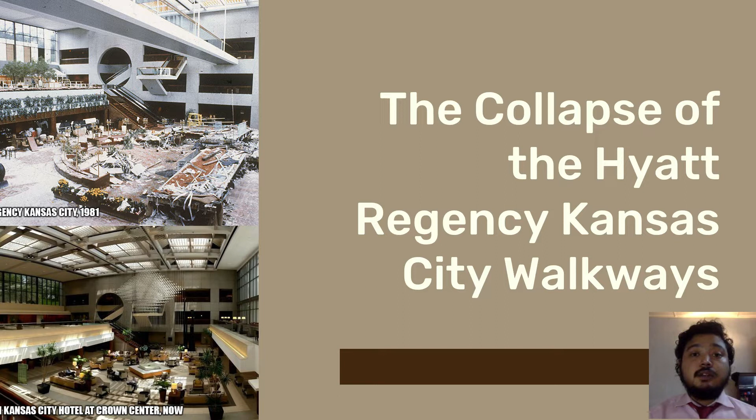Presenting the video during the event: July 17, 1981, Kansas City, 7:06 p.m. At the Hyatt Regency Hotel, two massive steel and concrete skywalks have just collapsed onto hundreds of people enjoying the hotel's tea dance. The area just inside the main entrance is now a mountain of smoking rubble. The collapse has broken a water main, and the lobby is slowly filling up with water.

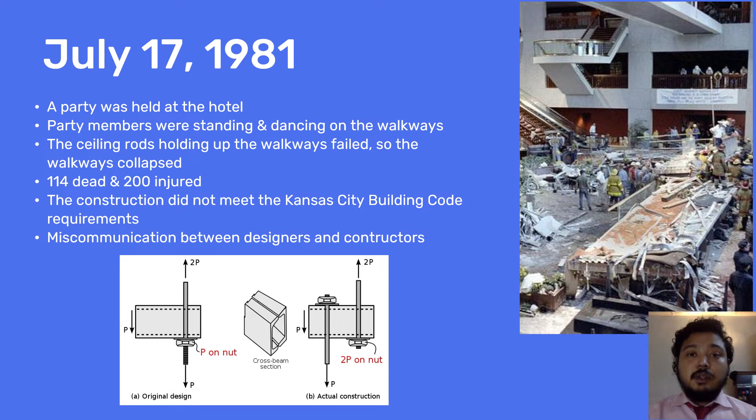On July 17, 1981, a party was held at the hotel. Party members were standing and dancing on the walkway. The ceiling rod holding up the walkway failed, so the walkway collapsed. During this event, 114 people died and 200 people were injured. The construction did not meet Kansas City building code requirements, and there was miscommunication between the designer and the constructor.

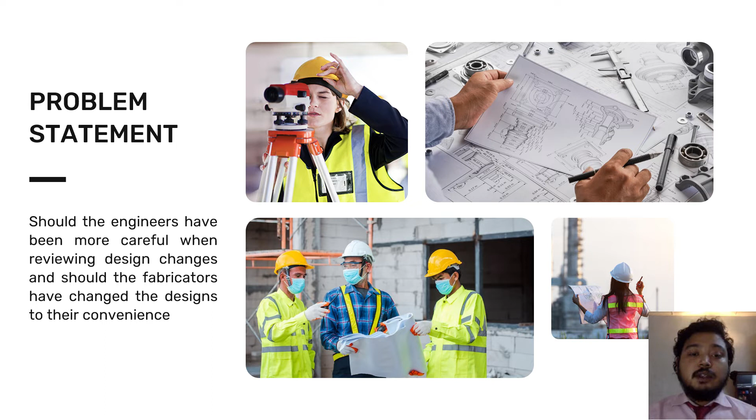Problem statement: Should engineers have been more careful when reviewing the design change, and should the fabricator have changed the design to their convenience? This raises an ethical issue.

Safety of the public was at stake, disregarding public welfare. The project engineer did not make any calculation for the design, but claimed it was safe. This shows negligence and incompetence of the engineer, and unprofessional conduct. There was a failure to meet city standards, and the fabricator worked to their convenience, not for the benefit of the public.

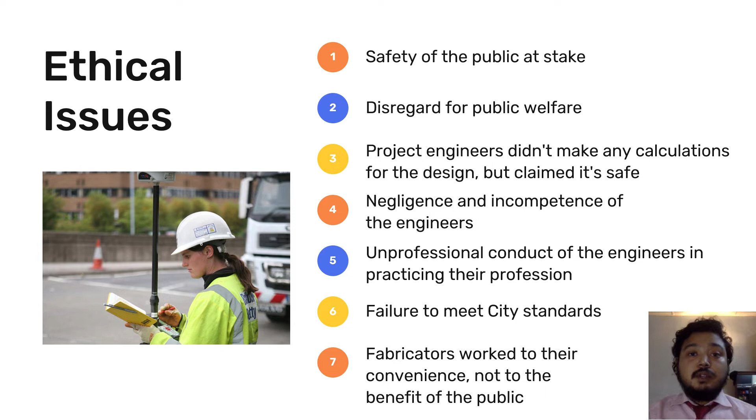Facts during this event: there was a party held at the hotel, two walkways collapsed, and the construction did not meet city requirements. The design change was a result of miscommunication. The fabricator changed the design, and the change was not noticed by the structural engineer. Many lives were affected, directly and indirectly.

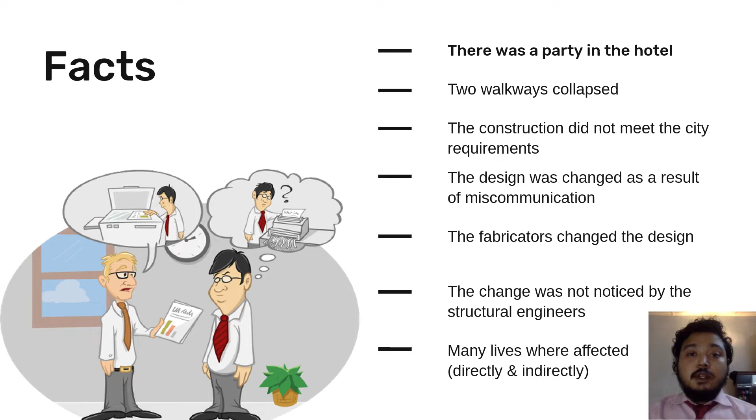Alternatives for this event: the engineer could accept blindly any change made to the design, or reject completely any change made to their design. The fabricator could proceed with the design as it was initially developed, regardless of difficulty, or find a better solution by giving it more thought and research.

The engineer can review the design modified by the fabricating company in more depth and perform calculations before approving. After the ceiling collapse due to connection failure, a thorough investigation into all connections can be done, not only to the ceiling. After the dispute happened, phone calls should have been made between engineer and fabricator to ensure there was no severe miscommunication.

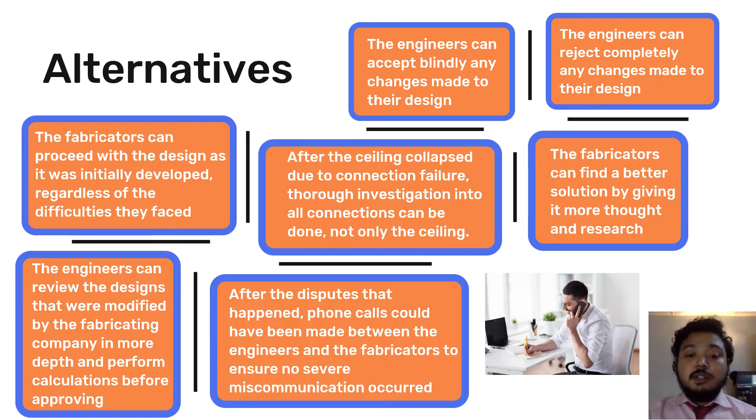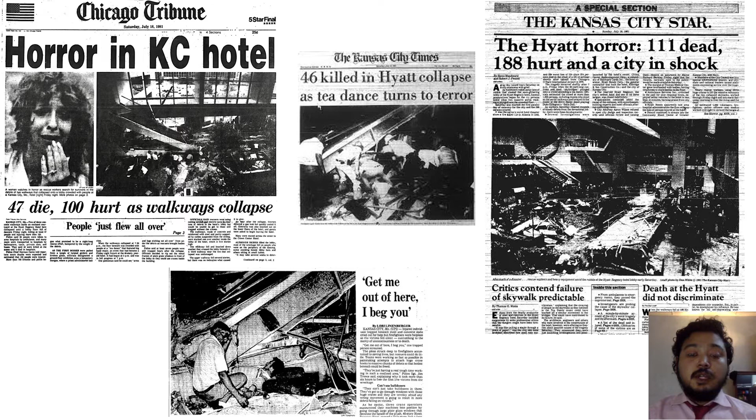Presenting the article during the event: as we can see from the Chicago Tribune, there was a reported 47 people dead. This number continued to grow as the days continued during the investigation.

Next, we will explain the second case study, which is Stadium Sultan Mizan Zainal Abidin's roof collapse. The incident happened on 2nd June 2009. At 9 a.m., while morning workers were doing maintenance, the sound of collapse was heard.

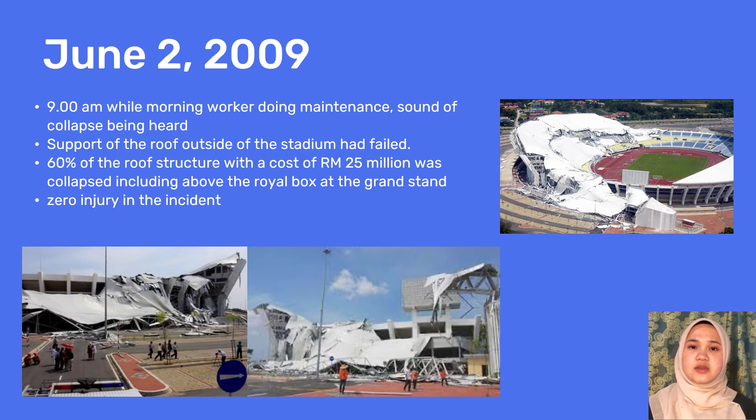The support of the roof outside the stadium had failed. 60% of the roof structure, costing RM25 million, collapsed, including above the royal box at the grandstand. This incident was reported with zero injuries.

This situation was thought to be out of standard because the engineer studied the leftover rubble, and therefore determined the speed of the collapse.

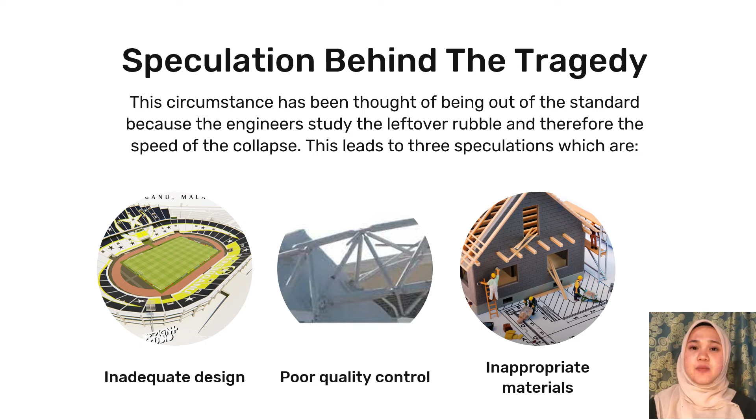This led to three speculations, which are inadequate design, poor quality control, and inappropriate materials. According to the State Infrastructure Development and Public Utilities Committee, the proposed method of work provided by the contractor to open the roof frame in the center was not accurate.

Here are some real reasons behind these tragedies. First, inadequate design with insufficient safety measures. Second, the designer failed to take full consideration of the roof structure support condition. Third, the roof is badly erected, resulting in inconsistent geometry.

There is no quality control for on-site safety measures. The material and manufacturing quality do not meet the specification. Lastly, the sensitivity of the spatial frame roof structure requires consideration to support flexibility in design mode, which was not done.

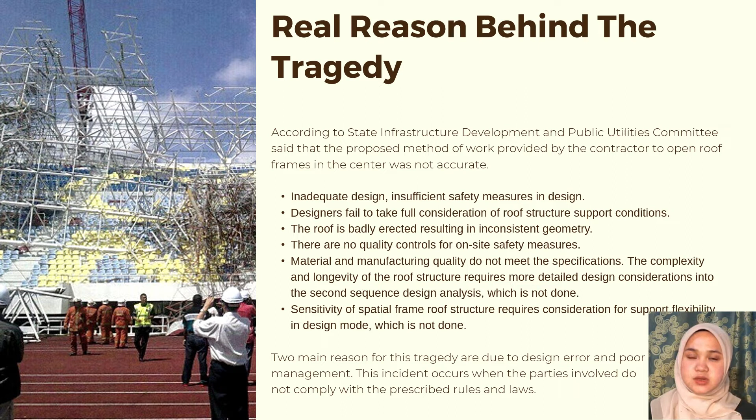From the above statement, we can conclude that there are two main reasons for this tragedy: first, due to poor management, and second, due to design error.

This is the flowchart for the design error factor. First, is the choice of material appropriate? If no, staff hired must supervise the process. If yes, it will go to the second process.

Does the concrete stump and the concrete buttress pass the regulation? If no, it will follow the regulation that had been set for the concrete. If yes, it will proceed to check and test the steel component.

If no, it will perform quality control and safety measurement by the management team. If yes, the structure of the roof is good and safe to use.

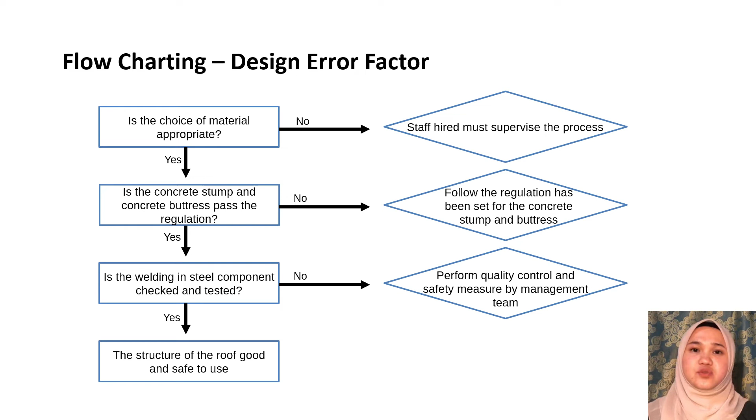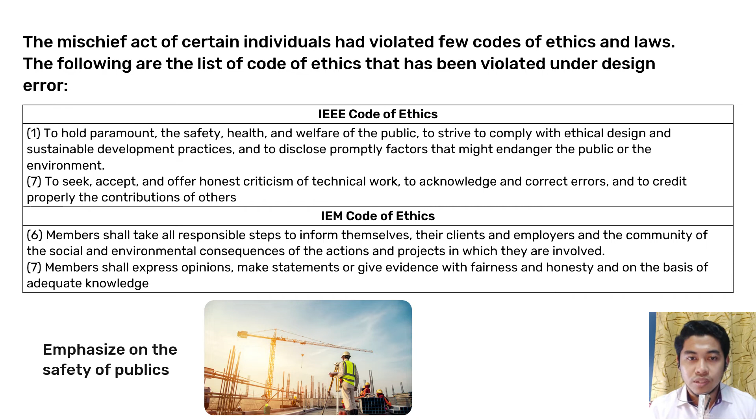The impact of this ethic is that these ethics emphasize the safety of the public. The engineers should have considered all safety aspects when designing the stadium. They should not have taken the critics on their design for granted. Instead, they should have taken responsibility to improve and deliver a better project.

In conclusion, even though both of the cases are not similar in terms of design specification, the root cause of the incident is the same: the engineers and the designers.

This issue can be avoided if the parties involved comply with the ethical guidelines and prioritize public safety instead of individual interests. The parties involved should have been more responsible in making decisions and taken into account every aspect involved very seriously, as it affected many lives.

We also think that all parties involved should communicate well with each other and be honest in their opinion or professional judgment. As an engineer, we must be responsible and put aside our individual importance, as every decision we make will cause a huge consequence in the future.

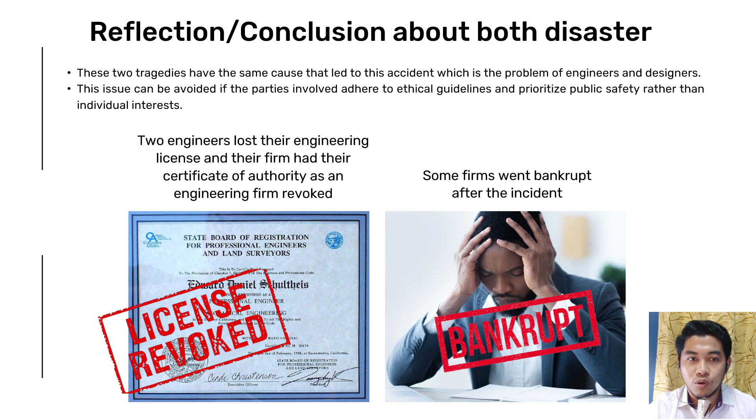From the case study, there are some effects from it. First, two engineers lost their engineering licenses and their firm had its certificate of authority as an engineering firm revoked, and some firms went bankrupt after the incidents.

That's all from us. We hope you got some information about the two case studies from us.